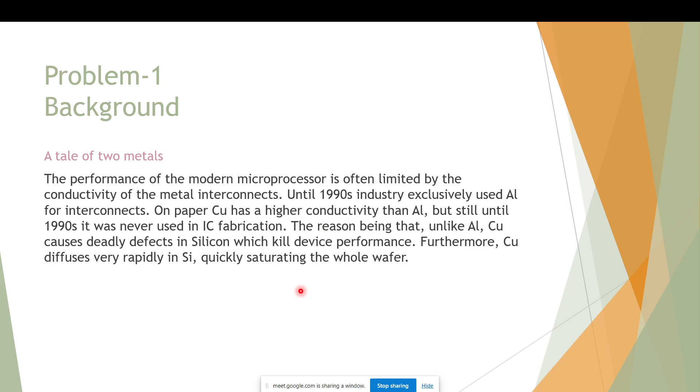The reason is that when we use copper over silicon, it kills the device performance, and that is due to rapid diffusion of copper in silicon. So this question is about diffusion, and now we will quantitatively understand why copper was not preferred, and aluminium was the preferred metal for making metal interconnects on silicon. So we shall investigate why copper was so hard to work with.

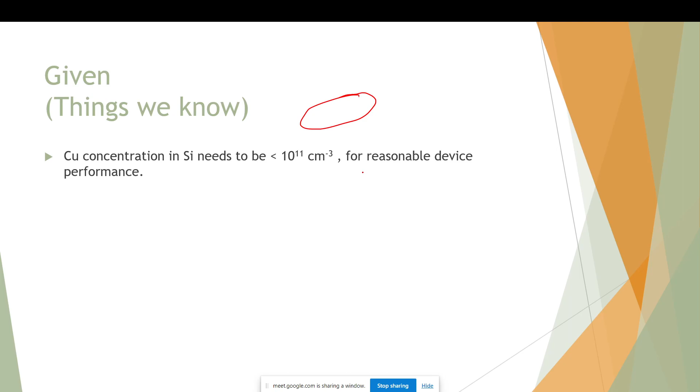In the problem we are given a few things. The first is that copper concentration in silicon needs to be less than 10 power 11 per centimeter cube. So in the silicon wafer, in a 1 centimeter cube volume, we need to have fewer than 10 power 11 copper atoms. The device that we want to fabricate makes this requirement necessary.

The wafer that we are working with is 500 micrometer thick. This is the cross sectional view, but the active layer is only 10 micrometer, so all the devices will lie in the first 10 micrometer. On the silicon wafer, we deposit a 300 nanometer thick layer of copper for metal interconnects. Maybe there is some pattern of copper on top of the active layer of silicon.

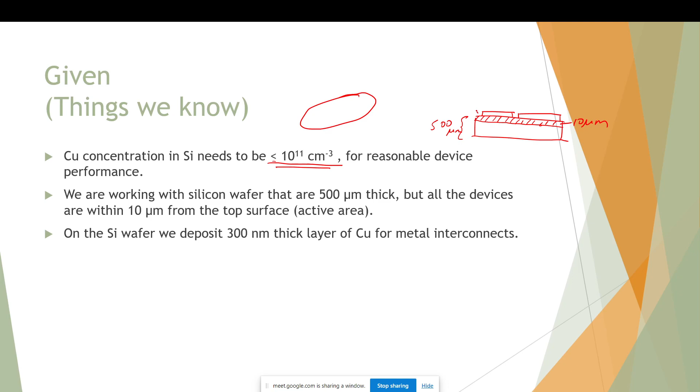So this is where the problem comes. Once we have deposited copper on top of silicon, even though we don't want it to diffuse, some part of it will diffuse into the silicon layer. The problem gets worse when, for further processing, the wafer must be at 400 degrees Celsius for 15 minutes after the copper deposition. So this is the problem.

They have given us the impurity and how much of it has been deposited on top of silicon. Now we have to find out how much of this impurity will diffuse into the silicon at this temperature for so much time. They have also given the solid solubility of copper in silicon. So first we have to decide our approach. If you were to model diffusion of copper into the underlying silicon using Fick's law of diffusion, which formula will be applicable?

So they are asking now which formula should we use. So in the class Fick's law of diffusion was taught. So we were taught the first law and the second law, and from that how do we arrive at the equations. So for arriving at the equations, you remember we used two types of boundary conditions. So one was the infinite dopant case and another was the finite dopant case.

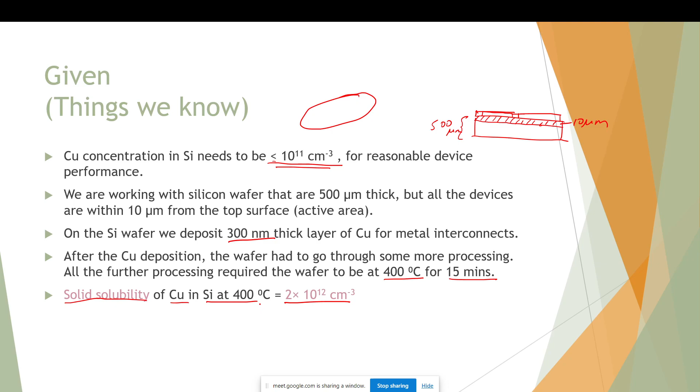Okay. So instead of thinking qualitatively, let us just start with whatever we are given. So they have given us the solid solubility. So solid solubility is 2 into 10 power 12 of copper in silicon at 400 degrees Celsius. So the solid solubility is given to be 2 into 10 power 12 per centimeter cube.

So if this is the solid solubility, what is the total number of copper atoms that can diffuse in the wafer? So what does solid solubility mean? So this many number of atoms can at max be diffused in 1 centimeter cube of wafer.

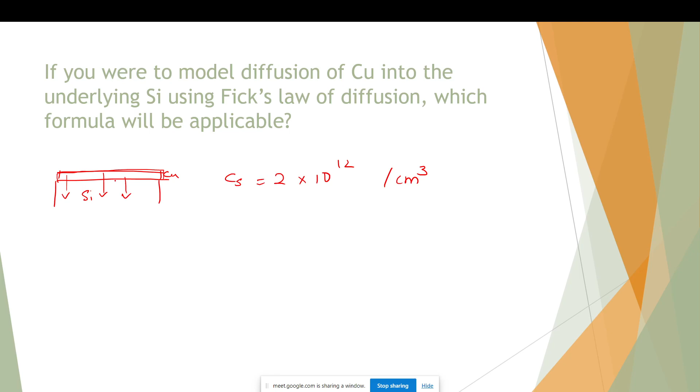So the total possible copper atoms in the entire wafer will be 2 into 10 power 12 into the volume of the wafer, right. So what is the volume of the wafer? It is the area of the wafer, that we do not know, into the thickness. So the thickness we know is 500 micrometer.

Okay, so 500 micrometer, I can write it as 5 into 10 power minus 2 centimeters, because this is in centimeter cube, I like to keep it in centimeters. So what do we get here? 10 power 11 times area. If you just do 5 2s are 10, it will come out something like this. Okay, so this many copper atoms can at max diffuse in the wafer.

So now let us find out how many copper atoms are there in the top layer. So how do we find out that? To know that, we should first know the density of copper. That we can find out on the internet, and I will give it to you now here. I should have given it in the question itself, I think. So density of copper is 8.96 gram per centimeter cube.

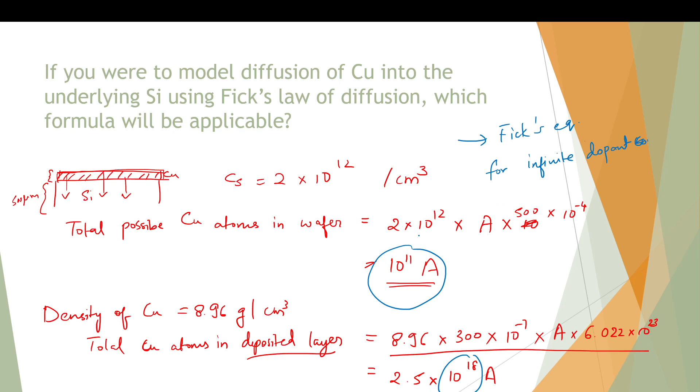So that's why we'll go ahead with Fick's equation for infinite dopants, or rather we can say the dopant concentration at the start, for x equal to 0, remains fixed. Okay. So now we decided which equation to use.

The next thing is, if you remember Fick's equation, I will write it here. So for the infinite case, Fick's equation was C of x comma t, the concentration as a function of position x, is equal to Cs, that is the solid solubility, times complementary error function of x by 2 root Dt. So this t is just time. Time we know is 15 minutes. Cs they have given us.

So we want to find the C of x comma t. The thing that we don't know is this D. Now D is what? Diffusivity or diffusion coefficient. So in order to find the diffusion coefficient, we make use of this equation here. Either we can just go on the net and find the diffusion coefficient for a given temperature, but most of the time it's easier to get the value of D naught. D naught is nothing but the diffusion for infinite temperature.

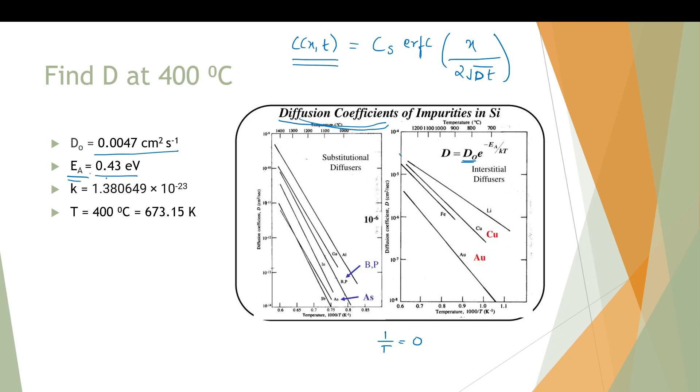and the energy, what is it called, I forgot the name. Does someone remember what EA was called? Activation energy, right? Thanks. So the activation energy for copper diffusion in silicon is given to be 0.43 electron volts. And this is the Boltzmann constant and the temperature that they have given us. So from this, can you find out D at 400 degrees Celsius? This is the equation.

So it's just substitution. D naught is 0.0047 times e power minus 0.43 into 1.6 10 power minus 19 upon kT, 1.38. So you can do it. Finally, I'll just tell the answer: 2.86 into 10 power minus 6 centimeter square per second. So you get the idea, right? If they have given you D naught and EA, we can easily find out D. So the next task is to find C.

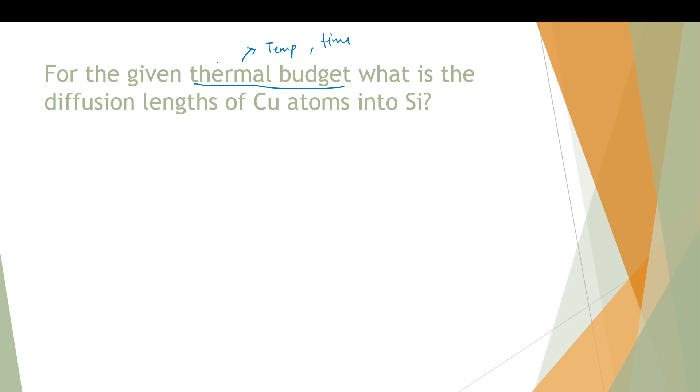So this is our copper, and we want to find the profile of copper as it starts diffusing into the silicon. This part is x equal to 0, and you go down to x equal to 500 microns. So for the given thermal budget, what is the diffusion length of copper atoms into silicon? First of all, what is thermal budget? Thermal budget is nothing but the temperature and the time that they give us. What temperature for how much time? The concise word for that is thermal budget.

So for the given thermal budget, that is temperature equal to 400 degrees Celsius and time equal to 900 seconds, find the diffusion length. Again, diffusion length is just direct formula substitution. We can get it to be this. From the previous question, we know the diffusion coefficient now, and root of diffusion coefficient into time gives us the diffusion length. Okay. So till now we have found root Dt, and we know Cs.

Now from Fick's equation for the infinite dopant case, at what depth in silicon will the copper concentration reduce to less than 10 power 11 per centimeter cube? So yeah, I have accidentally already shown the answer, but how will we go about doing this? So what we expect: this is copper, this is silicon. The copper will start to diffuse, and slowly the concentration will go down.

Someone is asking something. Can you unmute and ask? Okay, ma'am, will such type of questions be asked in the exam, like these sums and all? In the quizzes, I don't think. Exams, I'm not sure. I have not given the NPTEL course, but these were our assignment questions when we did this course in IISc, like in campus. So they can be asked. I don't know. Because in quizzes there are not such type of questions. There are only theory based questions. Yeah, yeah. These formulas and all, that thing is not taught by sir? These formulas are directly from the slide that I am taking.

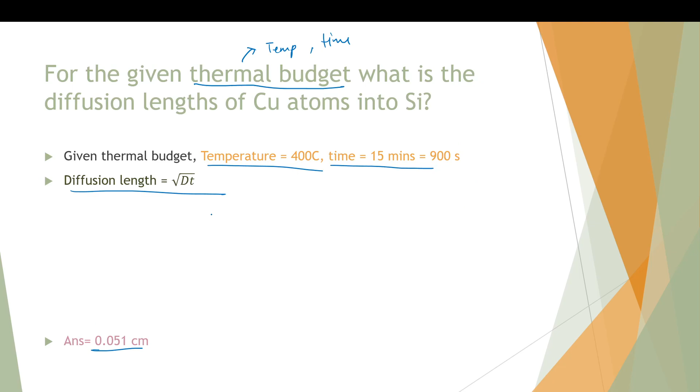Okay. So he has exactly shown all of these things in slides, just that the numbers I am putting were not there. So this formula is done, the Fick's equation is taught, also this diffusion length he has told in the class. Yes. Okay. Yeah, about the exam I am not sure. Like, I have not taken the NPTEL course before, so.

So from Fick's equation, at what depth in silicon will the copper concentration reduce to less than 10 power 11? So they have given us C of x comma t. So we have to find for what x will C of x comma t be less than 10 power 11. So when copper starts to diffuse into silicon, at the interface there will be more concentration, and as we go far, the concentration will go on reducing. So this relationship is given by this equation.

So this equation, prof has shown, not a derivation exactly, but how we get this equation they have shown in the class from Fick's. So there is Fick's first law and Fick's second law. From that you get a second order differential equation in position and first order in time, and then by applying some boundary conditions you get this solution. So that's where this equation is coming from, and now we have to find for what x we get C of x comma t equal to 10 power 11 per centimeter cube. So everything is given, we just need to substitute again, and we can find x. So here we find that x is equal to 1406 micrometer.

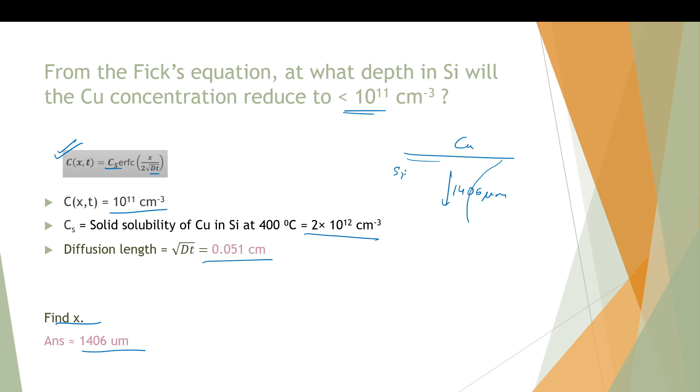So what does that mean? So the copper is all over the wafer now. The impurity has gone all the way through the wafer. So that is the problem with copper. Copper diffuses very fast. Forget about the first 10 microns, it has already covered the entire wafer. So the 10 micron of active region is no more useful to us, because we didn't want the copper to go inside. If you remember, the starting requirement was that the copper concentration should be kept below 10 power 11 atoms per centimeter cube.

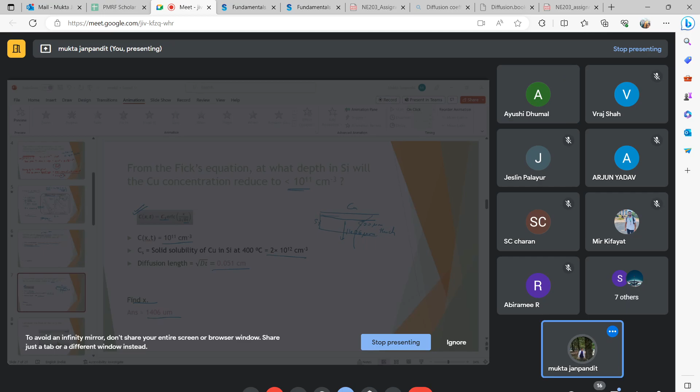Excuse me, I have a doubt. In this equation, the error function of some constant. So how are we going to get that ERFC of any value? Okay, so you can get the online calculator for that. If you want, I can share you the link, like Mathematica or something. Just a minute. Because x will be unknown. Yeah, yeah. Error function will be unknown. So in the exam, if they are asking, they might give you the required value. Okay, so here you will require the error function inverse actually, because you want to calculate the x, right? Inverse. Correct, correct. Just a minute, I think I have the website. I'll share it to you. Yeah, sure.

Try opening this. Is it? You,

Just like you find some tan inverse calculator, right? You can also find an error function. So this is not actually error function, it is complementary error function, like ERFC you search for. Okay. Okay, okay.

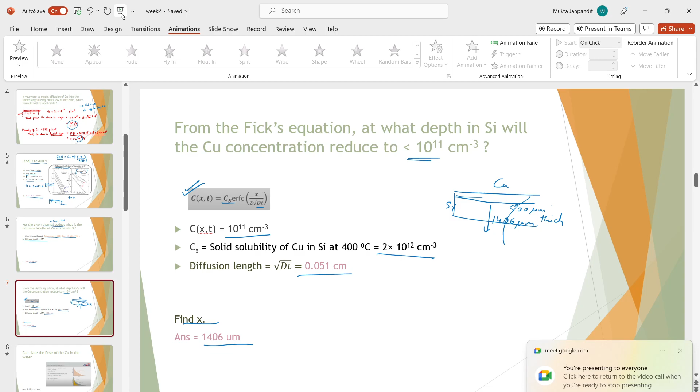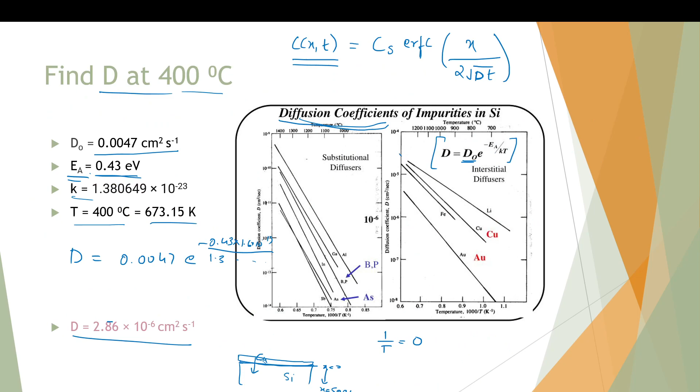Okay. Thank you. Can you see my screen now? I accidentally started from beginning. Yeah, yeah, we can see. Okay, thank you.

So again we know the solubility, we know the diffusion coefficient and the time. One thing to note is, if the diffusion coefficient is higher, then the dose will be higher. If time is higher, so if we are keeping it at a higher temperature for a higher time, then the amount of dopants inside the silicon will increase. Also solid solubility, it's directly related. So now this was for copper, right?

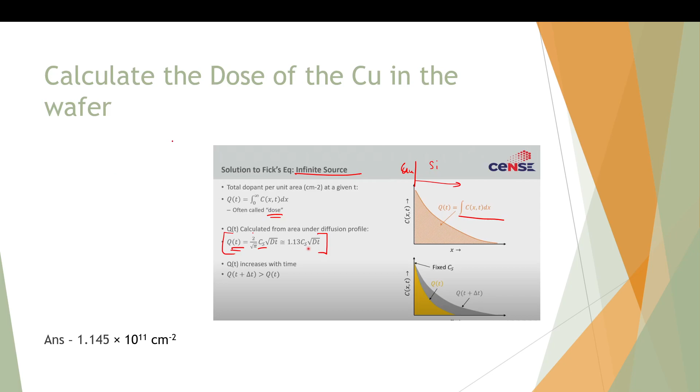Can you all try it for aluminium? I am giving the values here. Here you don't need to find the D. I am already giving the D at 400 degrees Celsius. So it is 1.83 into 10 power minus 23. The solid solubility also I am giving at 400 Celsius. And we want to find the x for which C of x comma t is less than 10 power 11 per centimeter cube. So yeah, time is again say 15 minutes.

Hello. Yeah. So basically, if you find it out, I'm not able to do it right now, but we should get it somewhere around 0.97 nanometers. Okay. Similarly, we can also calculate the dose. So the dose equation is Q of t equal to 2 by root pi Cs root of Dt. Okay. So from this we know all the things. We can calculate dose of aluminium.

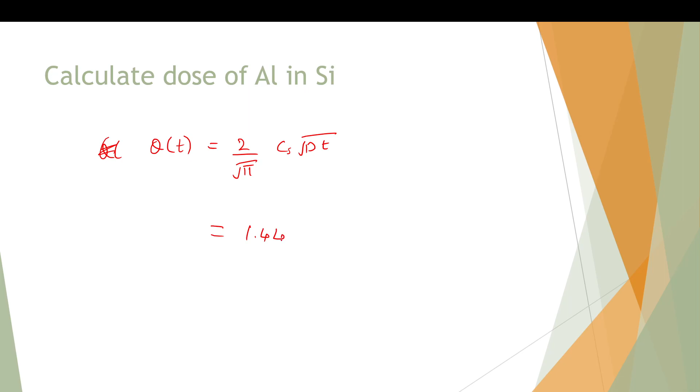The expected answer I can tell you right now. The expected answer is 1.44 into 10 power 8 atoms per centimeter square. If you compare this with the previous dose, we did not do the calculation, but there the dose that we are supposed to find is 10 power 11 per centimeter square. If we just substitute in all the things, we will find this. So this is 10 power 11 for copper, whereas for aluminium it comes out to be 10 power 8. So it's significantly lower, 3 or 4 orders of magnitude lower for aluminium.

So aluminium will diffuse a very small depth in silicon, and the rest of the silicon will remain almost pure. Okay, so that is why the first 10 micrometer, that was our device layer, will not have as much aluminium in it when compared to when we put copper on silicon. So that was the idea. That's why aluminium was preferred earlier for making electronic interconnects.

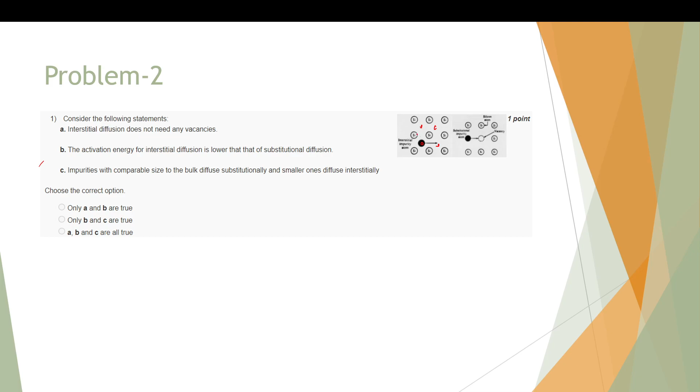Yeah, so the first option is interstitial diffusion does not need any vacancies. So is that true? So they have shown a small cartoon of interstitial diffusion. So this is the impurity. So all the silicons are in their respective places and the impurity occupies an interstitial site. So the silicon don't need to move away from their original place. So that's why we do not need any vacancies. So this is true.

The second one is the activation energy of interstitial diffusion is lower than that of substitutional diffusion. So is this true? So what is the activation energy? It is the energy required. We had learned this in chemical kinetics in our previous classes. So for any process, the initial system has some energy, final system has some energy, and to go from the initial system to the final system, it has to overcome some additional energy. So this difference is basically called the activation energy.

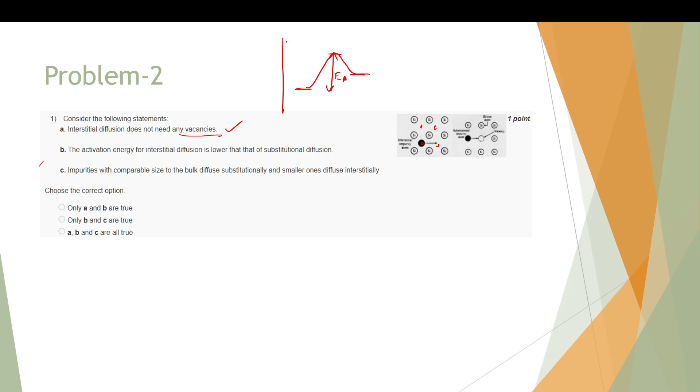So will this difference be higher? So this is energy, x is just, I don't know, reaction coordinate or something like that. So will this difference be higher for interstitial diffusion or substitutional diffusion? So remember, in interstitial diffusion, we do not need to move the silicon atoms and create a vacancy, whereas in substitutional diffusion we need. So for one impurity to hop from one substitutional site to another substitutional site, there needs to be a vacancy present. So naturally, in this case, the activation energy required will be higher. So the activation energy for interstitial diffusion is lower than that for substitutional diffusion. So this is also true.

So the next one is impurities with comparable size to the bulk diffuse substitutionally and smaller ones diffuse interstitially. So yeah, this is also quite obvious. This is also true. So if you have an impurity which is bigger in size, it won't be able to go to the interstitial sites. So it will need to substitute some silicon atom. So that is the case. So this is the correct option.

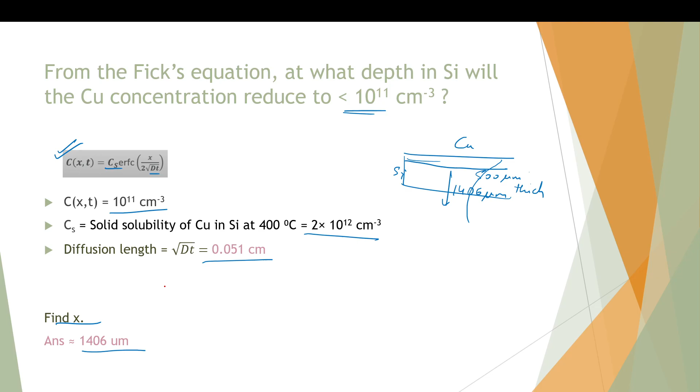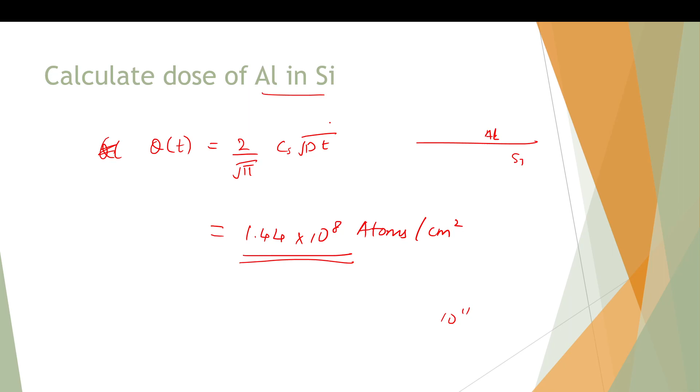So for aluminium, the dose of aluminium in silicon is 10 power 8, and the x for which we get 10 power 11 as our concentration is 0.97. Now if we compare that to copper, in case of copper we had 1406 micrometers depth and 10 power 11 dose, and here the depth of penetration is in nanometers and the dose is 10 power 8. So there is a 3-4 orders of magnitude difference, and that is why aluminium is used for interconnections, because it does not cause as many defects in silicon and it does not diffuse that much in silicon.

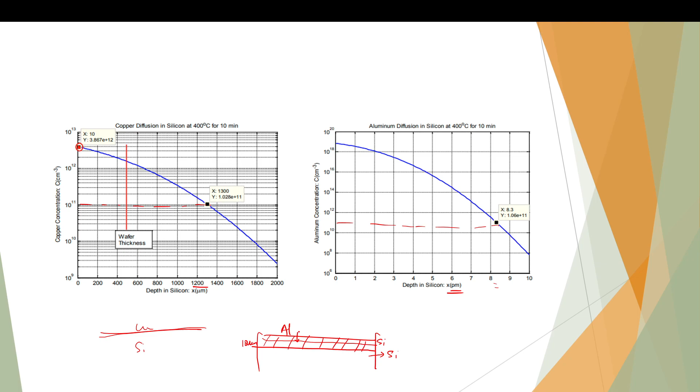So, this is just a comparison graph. Here you see that for copper, a concentration of 10 power 11 is achieved somewhere around 1200 to 1400 micrometers. However, aluminum concentration of 10 power 11 is achieved somewhere in picometers. So if this 10 micrometer of silicon was my device layer, aluminum will only penetrate some picometers of it, whereas copper will penetrate throughout. So the device layer is totally gone.

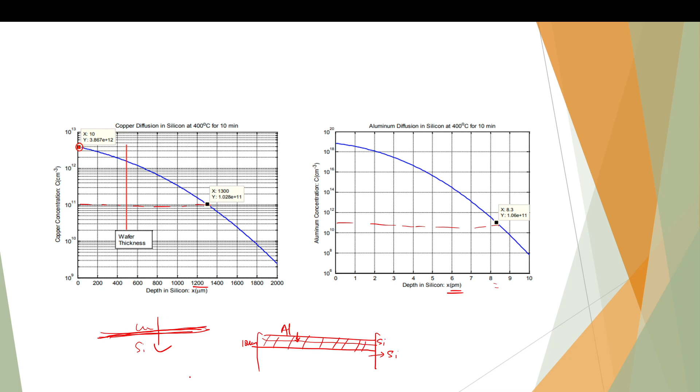So that is why they used to use aluminum for interconnects, and now these days they have some other advanced techniques to avoid this problem to some extent, and sometimes they put a barrier layer in between, so copper cannot diffuse as efficiently in the barrier layer. That helps in avoiding copper diffusion. So that was about it.

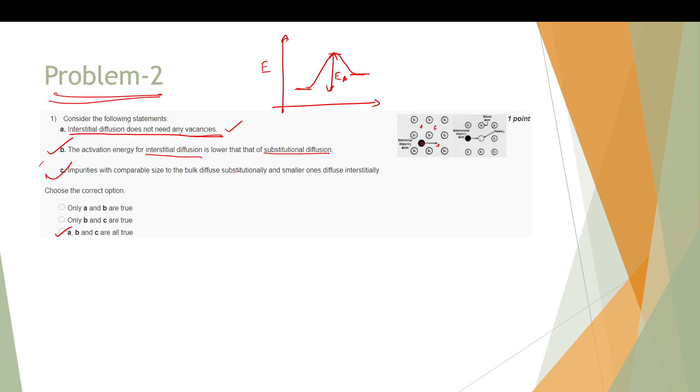So then problem 2. After this all the questions are quiz-like, multiple choice. Consider the following statements. The first statement is interstitial diffusion does not need any vacancies. Is it true or false? So what is interstitial diffusion first of all? If this black one is the impurity atom, we can see that it has gone and sat at a position in between the silicon lattice. The silicon lattice has not moved, only the impurity is sitting at the interstitial sites. So that is interstitial diffusion. If the impurity has to substitute the silicon in its lattice position, then that is substitutional diffusion.

So does interstitial diffusion need any vacancies? No, right. It just has to sit at the interstitial position; it does not need to displace any silicon. So this is true. The second statement is the activation energy of interstitial diffusion is lower than that of substitutional diffusion. The activation energy basically means that if I have a process with an initial state energy and a final state energy, to go from the initial to the final state we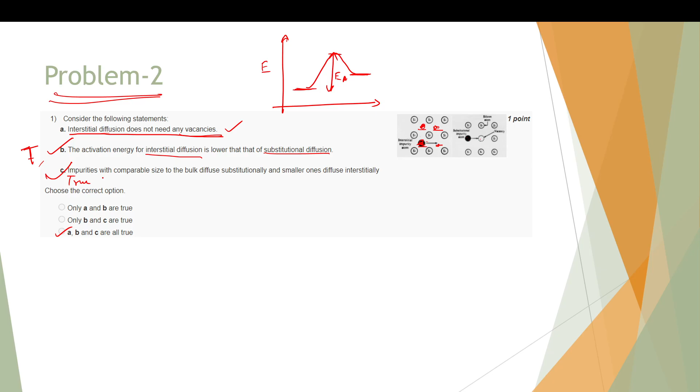And the next one: impurities with comparable size to the bulk diffuse substitutionally and smaller ones diffuse interstitially. Is this true or false? They are saying that impurities with sizes comparable to silicon will diffuse substitutionally, that is, they will move the silicon from its place and occupy the vacancy. Whenever there is a vacancy, only then it will move. So this is also true, you are right. That means A, B, C, all three are true.

The next problem is about solvent cleaning. What is the order of solvent cleaning? Do we first use acetone or IPA? What order should we follow? The hint is the boiling point. The boiling point of all the solvents is given here. 1, is it? So Nanindrajit, can you tell why 1? What is the explanation? How can you explain it with the help of the boiling point?

It is correct. So basically we should always do the solvent cleaning in the order of increasing boiling point. Yeah, if TCE is an option, then we can just do this. The same logic will apply. So first 56, then 65, then 74, then 83. At least that is what I believe.

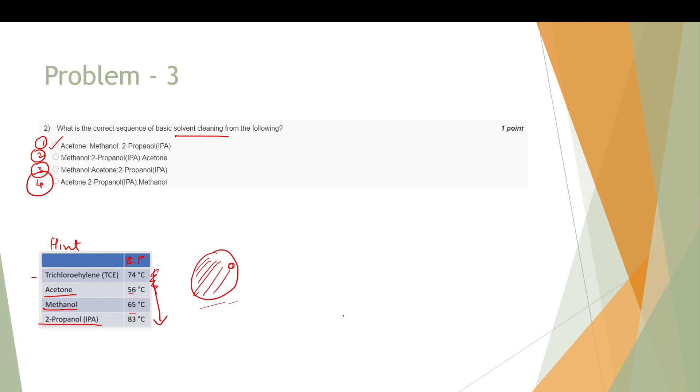So which of the following statements is false? The advantages of Ohmi clean are room temperature, fewer steps, fewer costly chemicals and lower waste. So Ohmi clean was discussed in class. This is an advanced clean suggested by Ohmi. So the original cleaning recipe, the standard cleaning procedure, is given here. You can see the number of steps in the standard cleaning. In standard cleaning, we have to first do a piranha clean, just to remove any gross impurities, then rinse it, then put a HF dip to remove the oxide. Whenever we do piranha clean, the top layer will form some oxide on it.

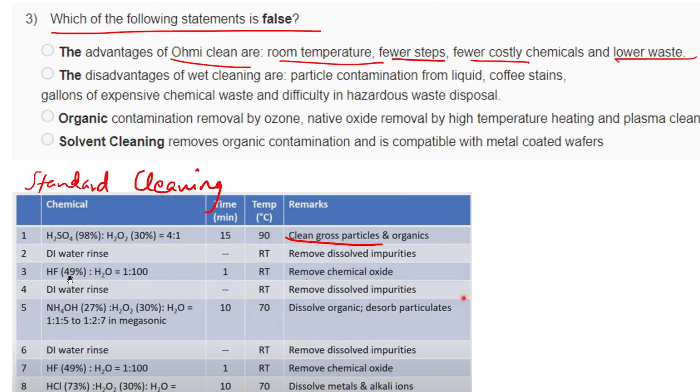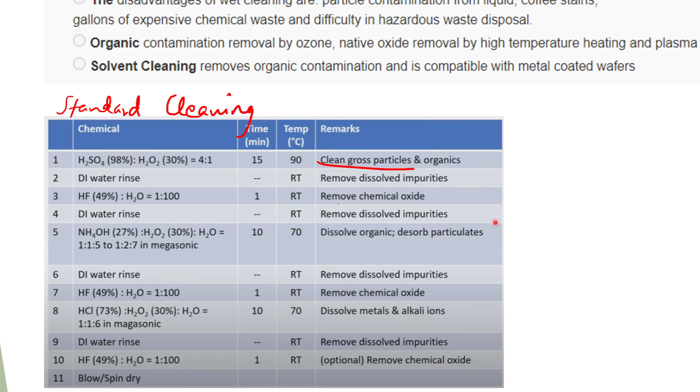You are not able to see, is it? Just a minute, I will zoom in. Now is it visible? So I am talking about the standard cleaning recipe right now. Oh sorry.

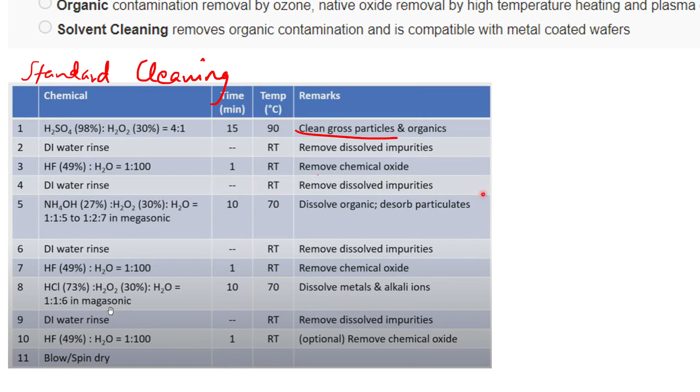So in the standard clean, if you see, first we do a piranha clean. Piranha clean will remove any particles or organic impurities. This is optional. If your wafer is clean, you don't do it. The next process is, because we did a piranha clean, there will be some oxide formed on top of it, so we need to remove that. To remove that, we do a HF dip. After the oxide is removed and after we rinse it properly, then we do RCA1 clean. For RCA1, these are the chemicals and the proportions, and that takes 10 minutes, and we also have to ensure that the temperature is 70 degrees Celsius. To reach that temperature also takes some time.

Then again we do a water rinse, and again we remove the oxide that is formed. Then again we do a RCA2 clean, same process again, remove the oxide, DI water rinse, then spin. So there are 11 processes involved in the standard cleaning procedure, right. So the next type they are suggesting is Ohmi clean. In Ohmi clean, what they came up with was a simple 5-step procedure. It is not simple, but the number of steps has reduced.

So instead of using H2O2 to oxidize like in Piranha or in RCA1 and RCA2, they use ozone, 5 parts per million of ozone in water, to oxidize the impurities, so organic or carbon or metal impurities. So just ozone can help us remove all of these. Then again, to remove oxide we still have to use HF, but the recipe is different here.

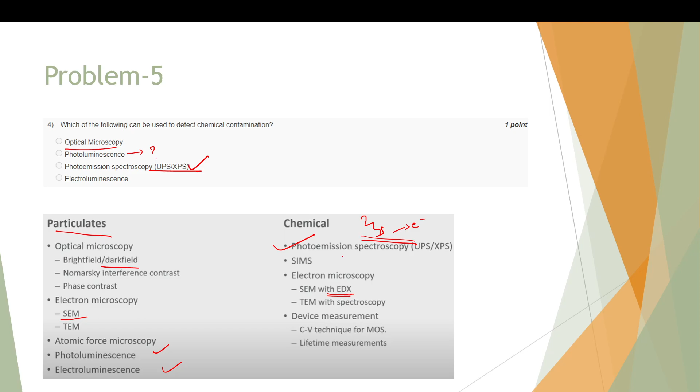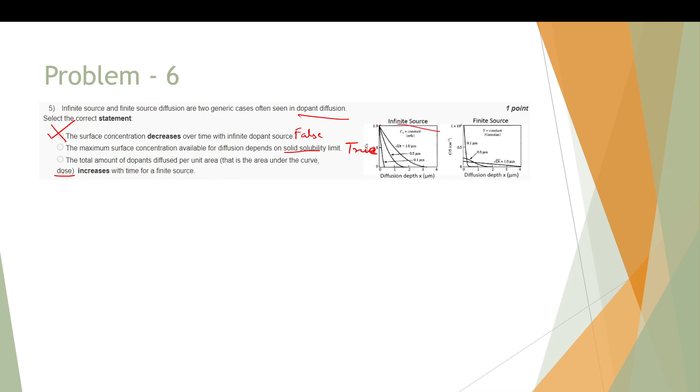So the third point is the total amount of dopants diffused per unit area, that is the area under the curve, that is the dose. The dose is the area under the curve, right? So the area under the curve increases with time for a finite source. Is this true or false? Someone wants to answer this?

So we can just look at the graph and answer, right? So in the finite source case, is the area under the curve increasing with time? No, right? As time is increasing, yeah, you're right. As time is increasing, the curve is shifting towards the right. However, the peak is reducing, so the net area will remain the same.

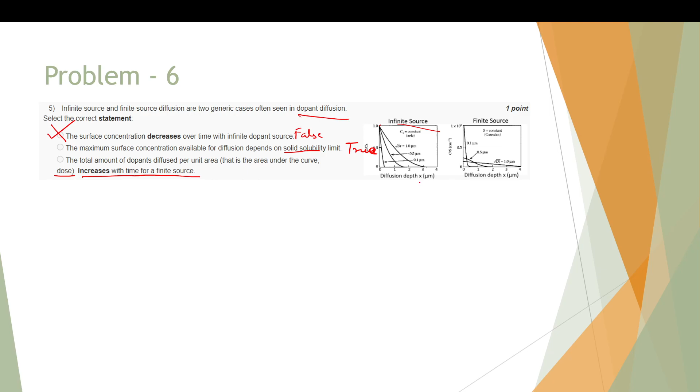And that is because we have a fixed amount of dopant present. So only that much will. So it's not an infinite source. So the total amount of dopant should remain constant. So the dose will always remain the same. Yeah. Thanks, Mir.

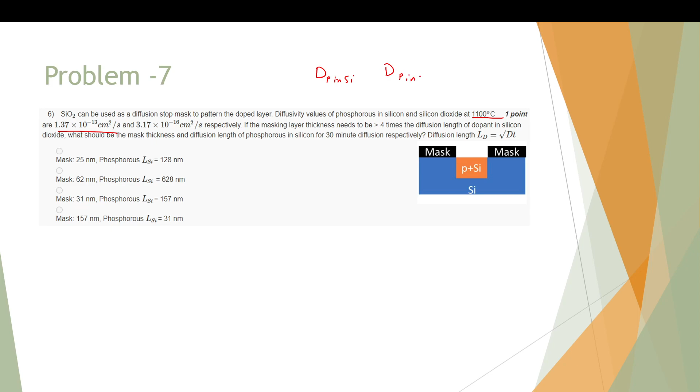Okay. So problem 7. Silicon dioxide can be used as a diffusion stop mask to pattern the doped layer. Diffusivity values of phosphorus in silicon and silicon dioxide at 1100 centigrade temperature are given. So these are D of phosphorus in silicon and D of phosphorus in oxide. So these both values are given to us.

If the masking layer thickness needs to be greater than 4 times the diffusion length of dopant in silicon dioxide, what should be the mask thickness and diffusion length of phosphorus in silicon? Okay, what are they asking? What should be the mask thickness? So mask thickness should be greater than 4 times the diffusion length. So they want to know what is 4 times the diffusion length of dopant in silicon dioxide.

Right. So this part is silicon dioxide, this is silicon, and the dopant is exposed to only some parts of silicon. So for this mask to work, the mask should be 4 times the diffusion length of phosphorus in it. So we can just calculate that. If you remember, the diffusion length is given by root D times t, right. So what will be LD of phosphorus in oxide?

That will be given by root of 3.17 into 10 power minus 16 into time. Did they give us time? They gave. So, 30 minute diffusion. 30 minutes means 30 times 60. So we can calculate this, and then the mask thickness will be 4 times of this.

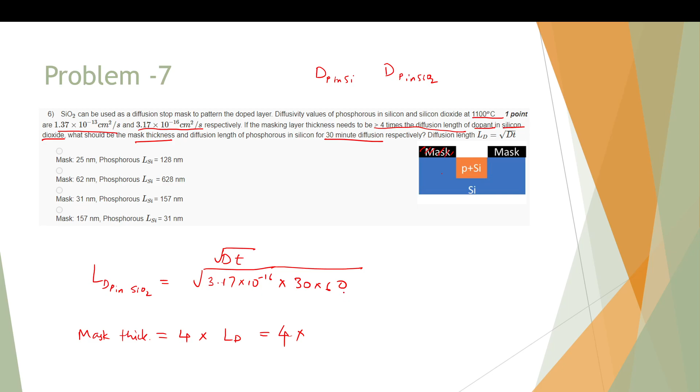Ten power minus 16. 6 is 18, 3 is... so after taking its square root, it will come somewhere around this, and then finally we will get something around 30 nanometer. So this is the mask thickness, 31 nanometer. So we get the third answer.

Also, we can find out L silicon. What had they asked? Diffusion length of phosphorus in silicon for 30 minutes. So root of D for silicon, 1.37 into 10 power minus 13, this is just formula substitution, into 30 minutes, which is 1800. If you just do it, I think we will get 157 nanometers. So this was fine, right? Basically we used the same formula for diffusion length to see what should be the mask thickness.

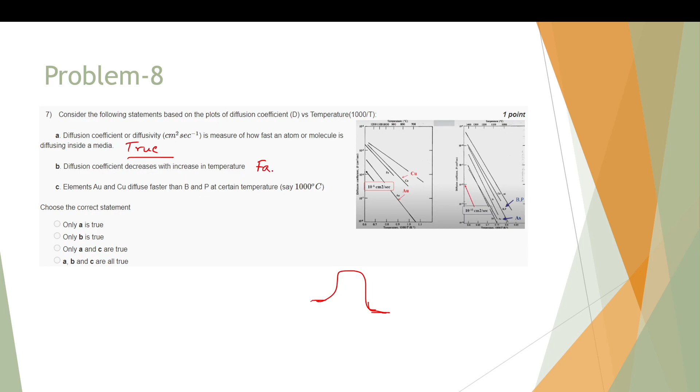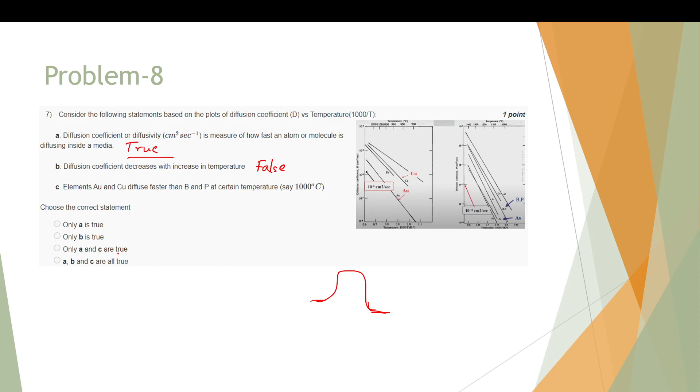False, right. So, this is false. And the third one is, thank you. So, third one is elements gold and copper diffuse faster than boron and phosphorus at certain temperature. Yes. Okay. So, A and C is the correct answer. Thank you. Let us go forward.

So, this is about the channeling effect. This is from the ion implantation class. Just to refresh, till now we were talking about diffusion. It is like we just have a dopant on top. So if I want to dope silicon with something, I will put that material on top and it will diffuse into silicon. But in ion implantation, we will have some mask like thing, and then we will bombard the ions on top of the silicon, and these ions will be implanted in the silicon.

So, basically it is not a passive process anymore, we are putting the electric field and putting the required atoms into the silicon. So, we will know the exact amount of atoms that we have put. So, this is used when we need to be sure of how much doping we want in the silicon, when we need an exact dopant profile in silicon. So, that was ion implantation. Basically, there is electric field applied, and because of the electric field the ions will be bombarded on the

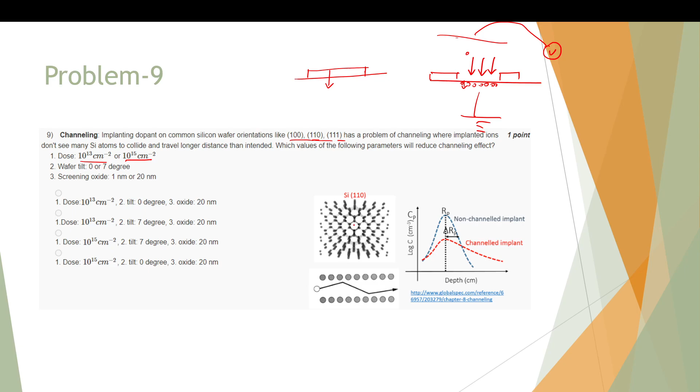So, what will happen in channeling is, basically if you see the silicon surface, since it is a crystalline solid, there will be atoms arranged in some nice periodic manner. So, there will be such channels which the impurities will see, and they can go through them. You can see in this cartoon, this impurity is going through a channel. Somewhere it will collide, but because there are these open paths, it can avoid a lot of collisions. So, the profile that we expect for a non-channeling case will look something like the blue curve, but for the channeling case it will have a tail at the end.

So, this tail is something that we did not expect from our calculations. So, that is not desirable. When we are doing an ion implantation, we want the profile to match exactly our expectations, because that is why we are doing ion implantation. Otherwise, we could have stuck to diffusion or some other passive way. Already we are harming the wafer by bombarding it with ions, and if we are still not getting the profile that we want, it is not a desirable thing. So, we need to avoid this channeling. So, how to avoid it?

So the dose is how many ions we are bombarding, so how much doping we are giving. So should the dose be higher or lower? Anyone wants to take a guess? So what happens is, to avoid channeling, we need to break the channels. Now to break the channels, it is easier when there is higher dose. So what happens when there is higher dose?

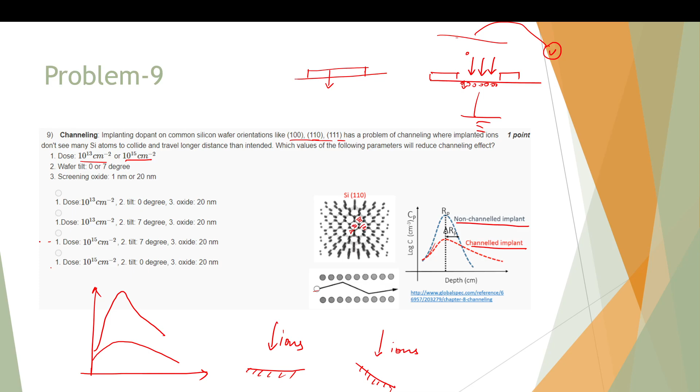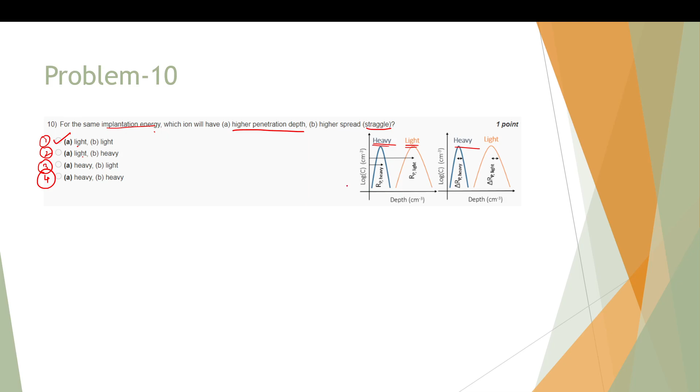Actually, no. The relation that sir told in class is that the heavier ion will actually spread less, have a smaller straggle, and also penetrate less compared to the lighter atom, which will go to more depths, and its spread will also be high. The reason I am not sure. You can check the presentation. Okay, the reason I'll look up and tell in the next class.